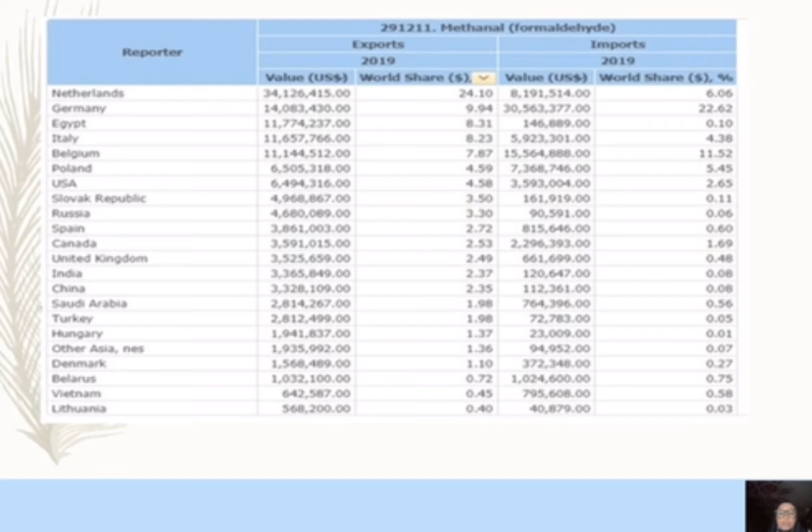and Vietnam. While the world's largest importers of this commodity group in 2019 are first Germany, followed by Belgium, Netherlands, France, and Poland. Okay, this is the graph of export and import 2019 of the formaldehyde production. Okay, we move to market study in Malaysia.

The Malaysian formaldehyde market dropped to 23 million USD in 2010, declined by -7.4% against the previous year. The growth pace was the most rapid in 2009, an increase of 1.2% year over year. Formaldehyde consumption peaked at 26 million in 2007. The most prominent rate of growth was recorded in 2009 when the production volume increased by 2.8% year to year. Over the period under review, production reached the maximum level of 26 million in 2007.

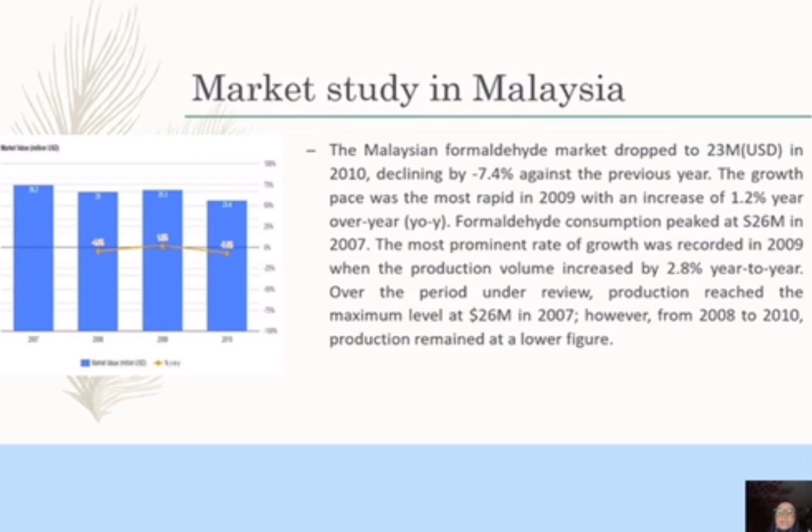We move to the consumption. In 2010, consumption of formaldehyde was finally on the rise and reached 59,000 tons after 2 years of decline. Overall, consumption showed a pronounced contraction. Consumption reached the peak volume of 67,000 in 2007. However, from 2008 to 2010, consumption stood at a somewhat lower figure. You can see at the

table left. The revenue of the formaldehyde market in Malaysia fell to 23 million USD in 2010, declining by -7.4% against the previous year 2009. The most prominent rate of growth was recorded in 2009 when the market value increased by 1.2% year over year. Over the period under review, the market hit record highs at 26 million in 2007. However, from 2008 to 2010, consumption remained at the lower figure.

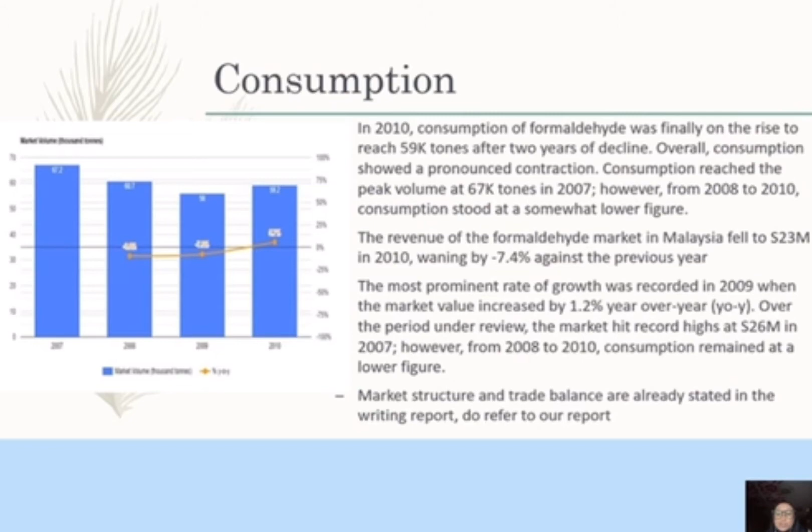Export of formaldehyde. Export from Malaysia. In 2020, the amount of formaldehyde export increased compared to 2019. Over the period under review, export showed buoyant growth. The pace of growth appeared the most rapid in 2012 with the increase year to year. Export peaked in 2020 and is expected to retain growth in years to come. Generally, the export recorded resilient growth.

The most prominent rate of growth was recorded in 2012 with the increase year to year. Over the period under review, export reached the peak figure in 2020 and is likely to continue growth in years to come. Okay, export by country. Thailand, Philippines and Vietnam were the main destinations of formaldehyde export from Malaysia from 2007 to 2020. In value terms, the Philippines, Thailand and Vietnam were the largest markets for formaldehyde export from Malaysia worldwide. Among the main countries of destination, Vietnam showed the highest growth rate.

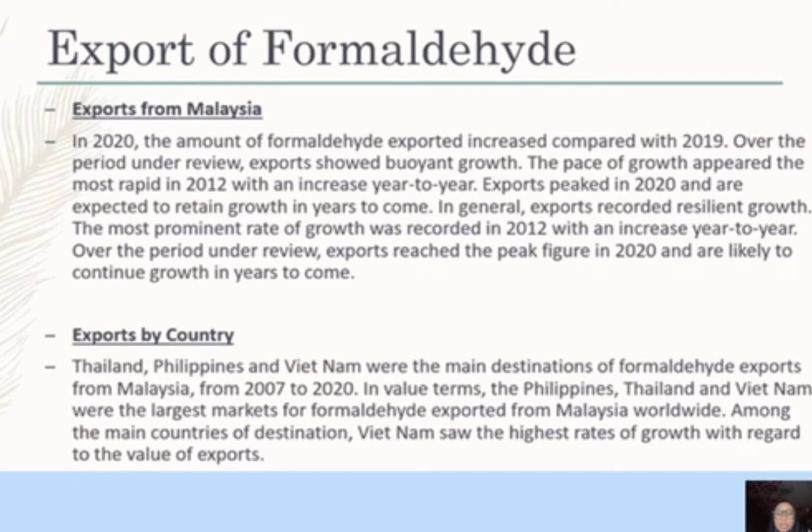We move to the import. Import into Malaysia in 2020: after 2 years of growth, there was a significant decline in overseas purchases of formaldehyde. The volume decreased. The most prominent rate of growth was recorded in 2018 with the increase year to year. Imports peaked in 2007. However, from 2008 to 2020, imports remained at a lower figure.

In value terms, formaldehyde imports declined significantly in 2020. Overall, imports show a drastic downturn. The pace of growth appeared most rapid in 2018 with an increase against the previous year. From 2019 to 2020, the growth imports remained at a lower figure.

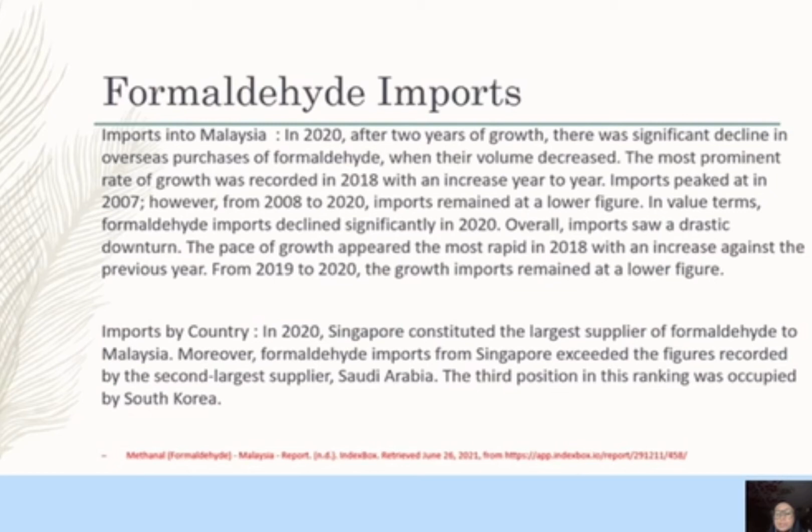Okay, import by country. In 2020, Singapore constituted the largest supplier of formaldehyde to Malaysia. Moreover, the formaldehyde imports from Singapore exceeded the figure recorded by the second largest supplier, which is Saudi Arabia. The third position is ranked by South Korea.

For formaldehyde itself, eliminate any unnecessary dilution, so it will help the waste minimization. And next, do not mix the waste streams, separate the waste streams. This will help to minimize the waste.

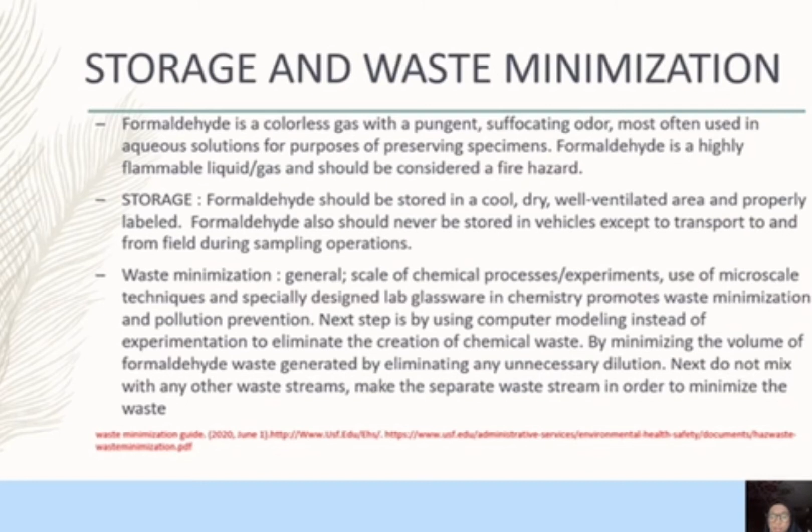I would like to continue my presentation on the process specifications part 2. Basically, I already explained the process specification for the equipment under the reactor. Today I would like to explain more on the process specification for two pieces of equipment, which are the absorber and the separator. So firstly is the absorber. What is an absorber?

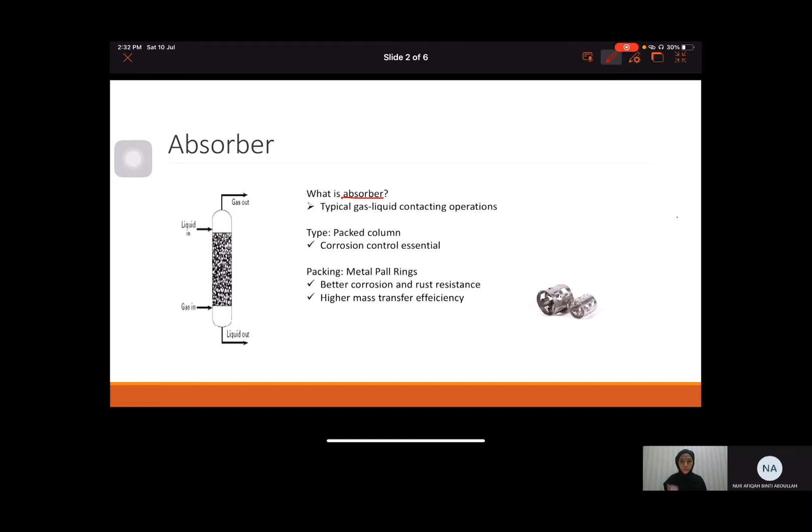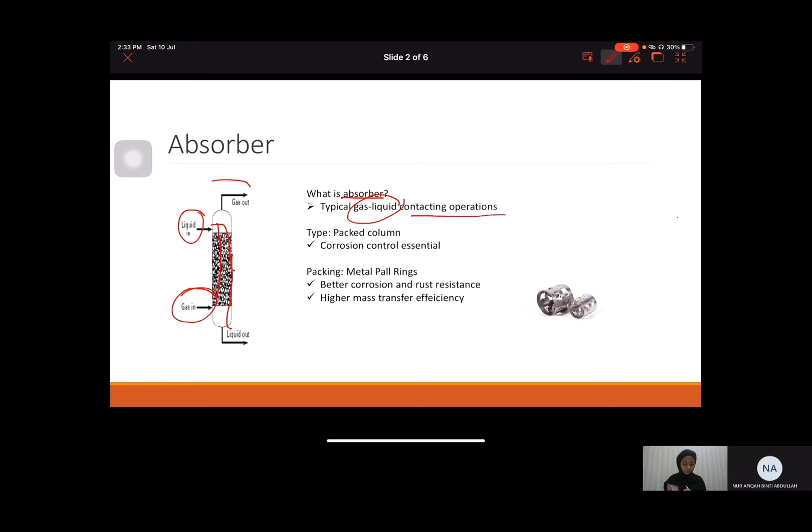An absorber is a typical gas-liquid contacting operation, where the gas travels up through the vessel, and the absorbed component goes into the liquid and is gradually removed from the gas. The absorber may be a packed column, bubble column, or spray column, so why do we choose a packed column? The figure shown here is a packed column. We chose a packed column for our production.

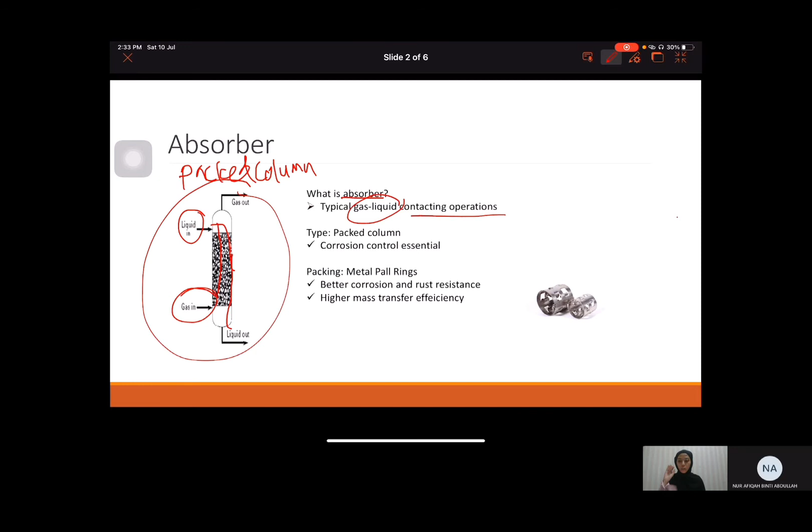This is because the packed column has advantages where corrosion control is essential. Since we are dealing with methanol and other substances that are quite corrosive, we need a packed column compared to other columns in order to handle corrosive substances, and also to handle toxic and flammable liquids.

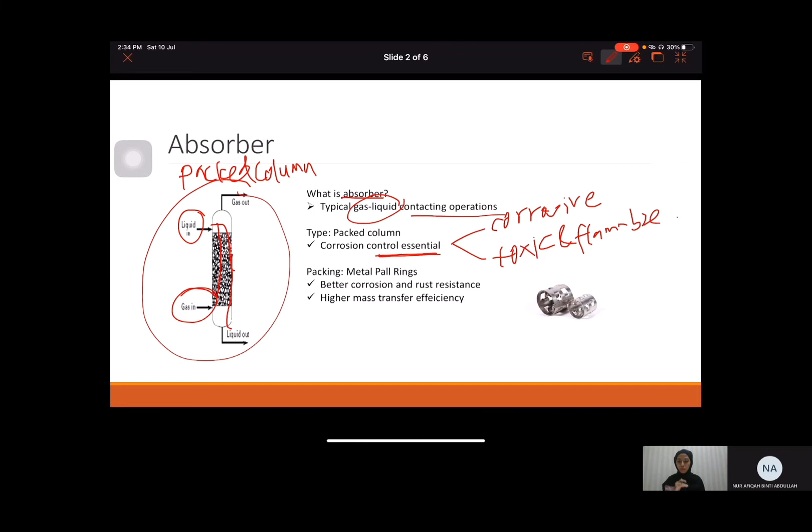Next, packings. The absorber packing we chose is metal Pall rings. Firstly, metal Pall rings are more suitable than plastic Pall rings because they have better corrosion and rust resistance, higher mass transfer efficiency, and better liquid and gas distribution. As I told you, our production deals with corrosive substances. Therefore, we need metal Pall rings as the packing for the absorber.

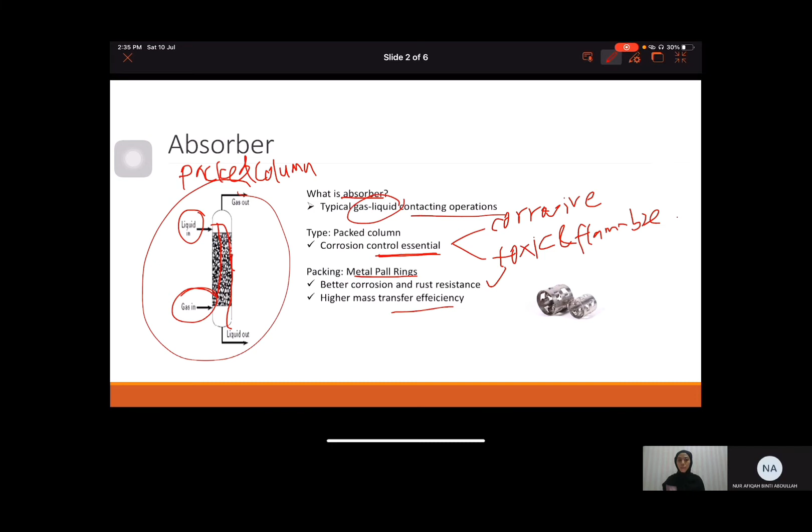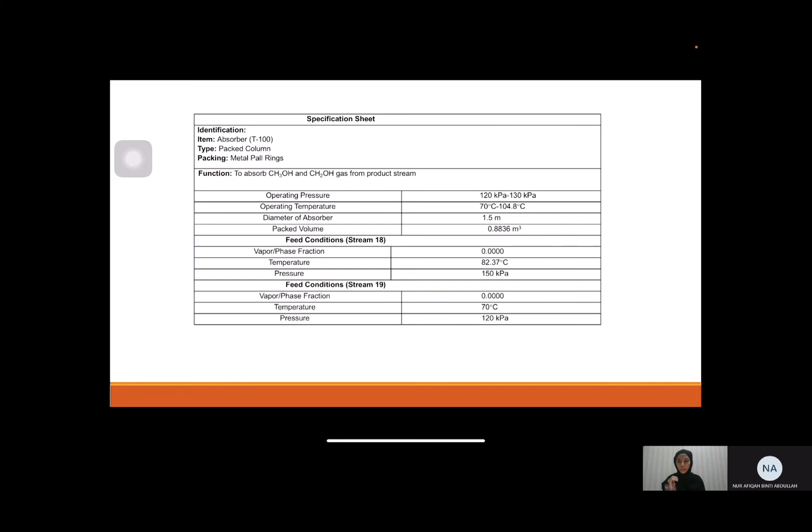Next is the specification sheet for the absorber. As you see here, this is the absorber T100, and the operating pressure shows values of 120 to 130 kPa. I obtained this data from the HYSYS simulation.

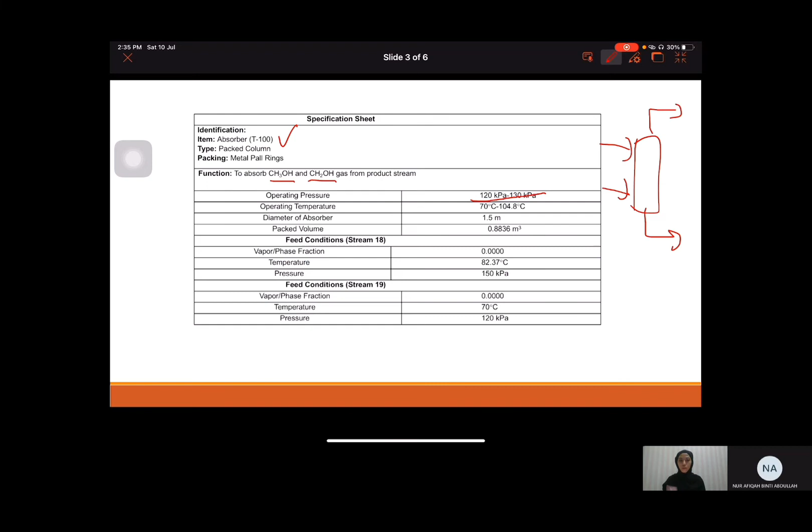The function of the absorber is to absorb the methanol in order to obtain the product without any gas. This is the off gas. And this is our product here, which contains formaldehyde.

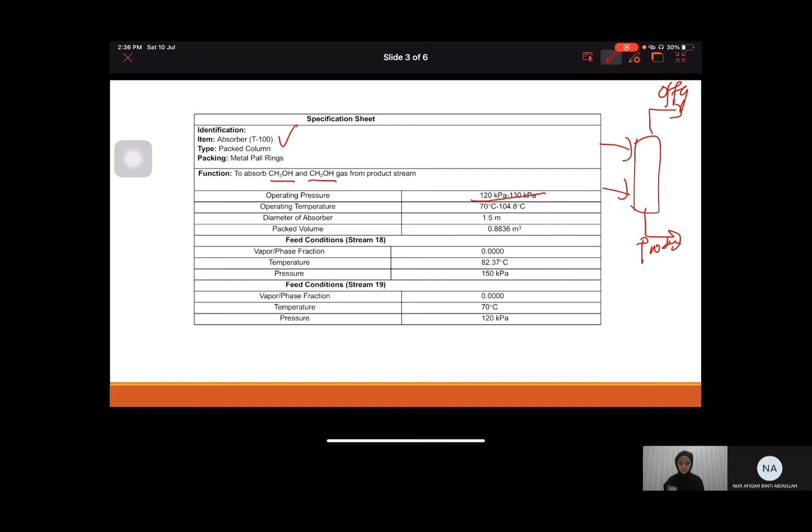Next is also an absorber, but this absorber contains a reboiler. We need a second absorber for our production to become more efficient. This was already explained by ICA for the HYSYS simulation. The data here I obtained from the HYSYS simulation, where the operating pressure is 120 kPa to 130 kPa, and the operating temperature is 70 degrees C to 104.8 degrees C.

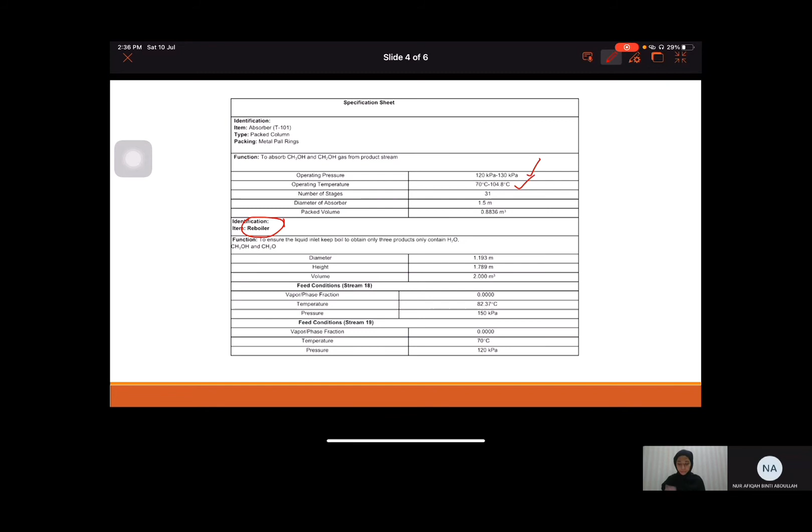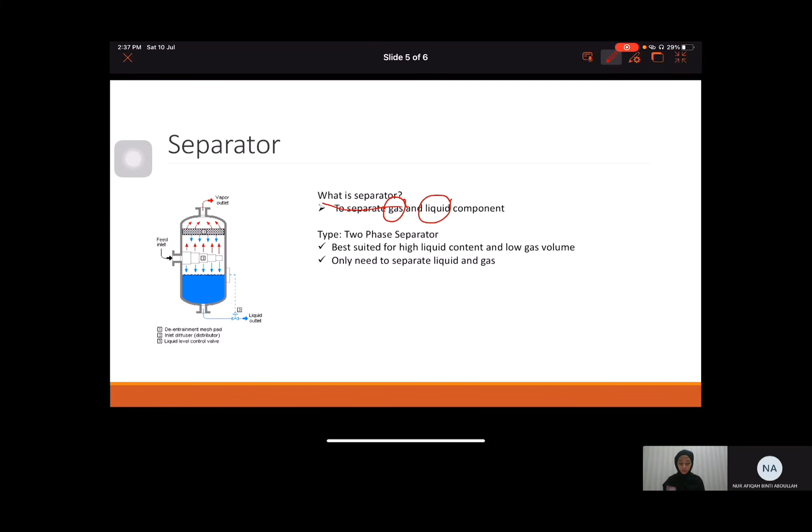Next is the separator. What is a separator? A separator is a vessel used to separate the gas and liquid components from the fluid extraction. There are many types of separators: two-phase and three-phase separators. Why do we need a two-phase separator for our production? Firstly, a two-phase separator is best suited for streams with high liquid content and low gas volume, where it extracts the liquids from the natural gas.

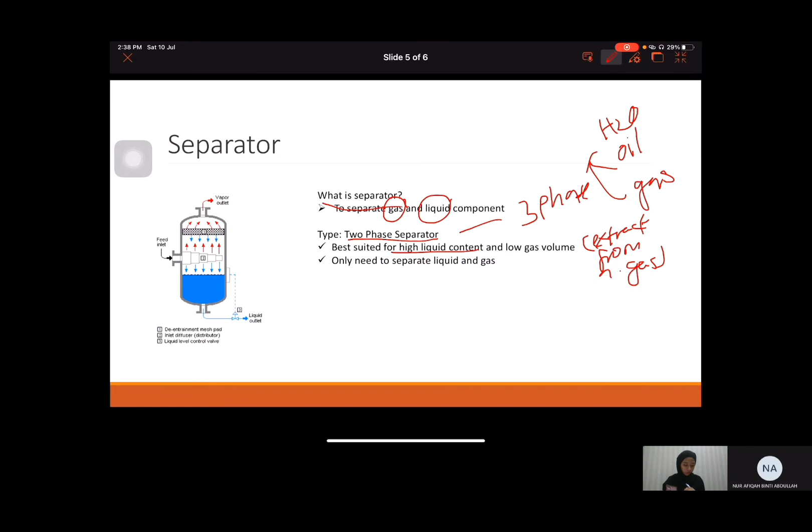Next, a two-phase separator only needs to separate the liquid and the gas, compared to a three-phase separator, which separates well fluids into H2O, oil, and gas. Since our production only involves liquid, water, and gas, and we don't use any oil, our production of formaldehyde only needs a two-phase separator.

Here is the liquid and the gas, since we don't have any oil. And here is a two-phase separator diagram, where as you can see, the outlets are vapor and liquid, no oil.

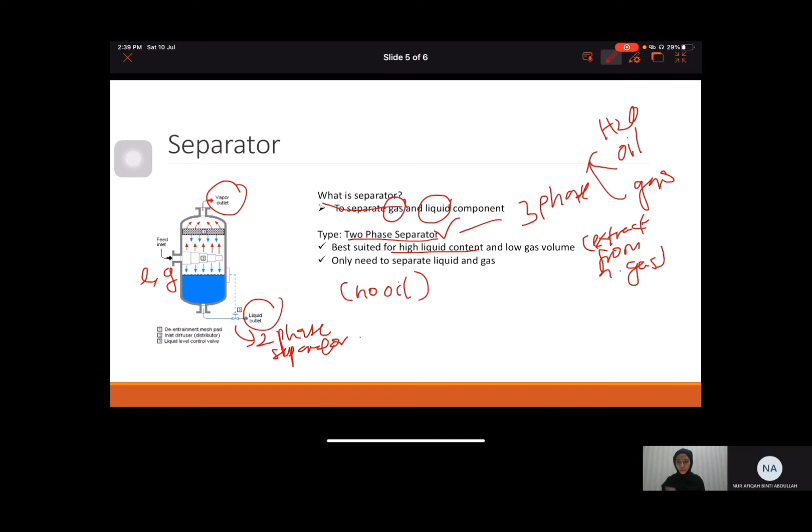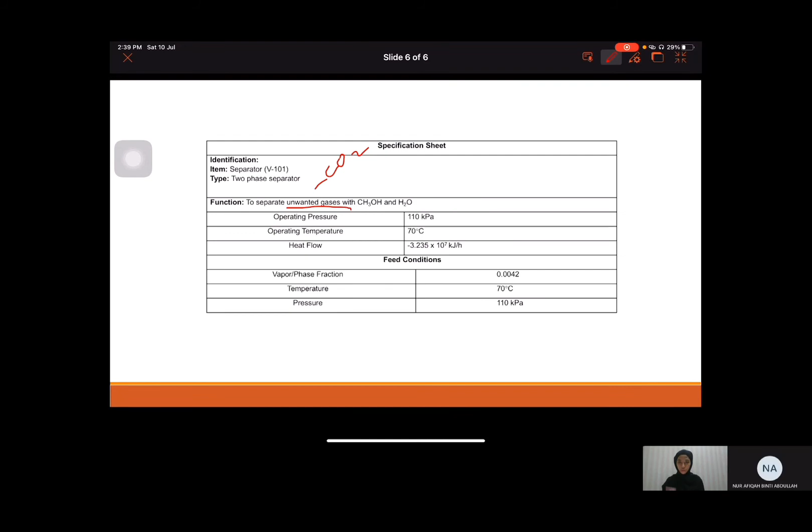So in part 1 we already have done up until the reactor unit only, and I will continue to the last part, which is a complete HYSYS simulation of formaldehyde production. So first we look into the separation unit. In our project we use an absorber unit. So what is the need of the absorber unit?

The main objective of the absorber stage is to condense formaldehyde, methanol and water, which may contain a selection of packing, trays and other features to promote the absorption, and in order to optimize the set of operational conditions and increase efficiency of the absorber. One study has been made by Winkelmann 2003, which is to apply two sequences of the absorber column. The separation unit may comprise absorption to extract the formaldehyde product from the oxidized gas mixture.

The reason why we don't apply a distillation column here is because this absorber sequence has superior convergence and stability characteristics rather than a distillation column, since distillation will give more calculation and iteration, resulting in an unconverged system.

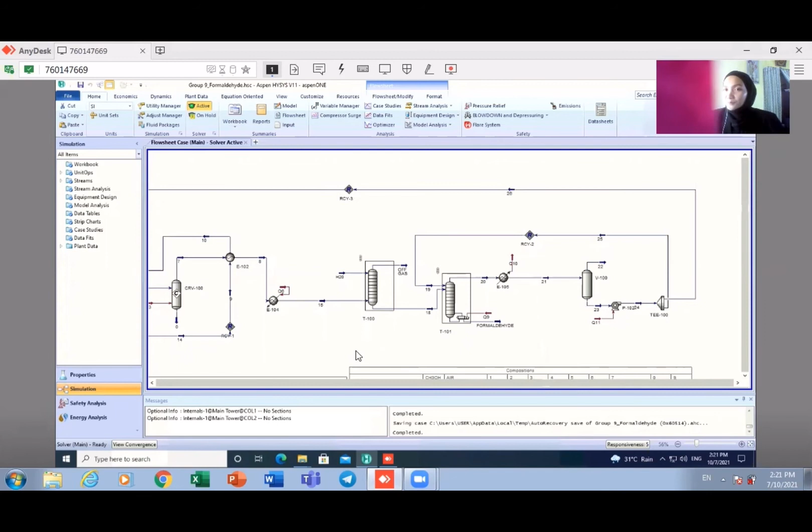So let's start with the HYSYS simulations. We continued with the product from the reactor. After the product from the reactor has been cooled down, from 650 degrees Celsius to 100 degrees Celsius in order to prevent any thermal decomposition of formaldehyde, where in this case we apply the network heat exchanger circuit to create a circulation of the water.

This product is then fed to absorber column 1, and in the absorber the water is fed at the top of the column to reduce the emissions of formaldehyde and methanol from the column. The top pressure of the column is 1.4 bar and the bottom pressure is 1.5 bar. The pressure at the top of the column must be lower than the pressure at the bottom to avoid any backflow and flooding in the column.

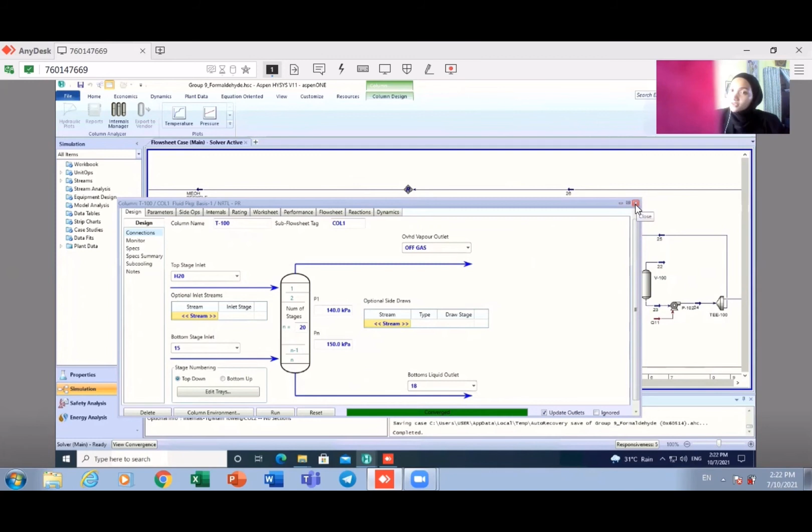And the formaldehyde is absorbed in water because formaldehyde is pure in gaseous form and highly unstable. It is also because the reactor product stream contains formaldehyde diluted in other gases, mainly nitrogen. As you can see here, the composition here is mainly nitrogen. So that's why the water must be fed at the top stream.

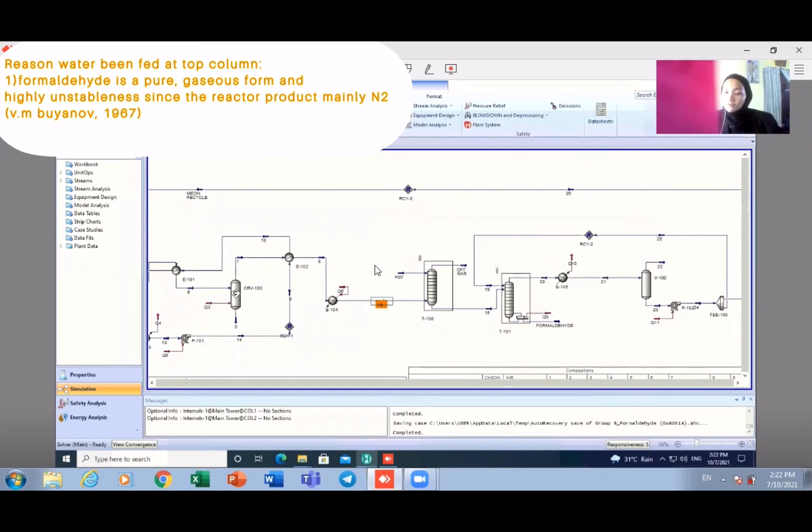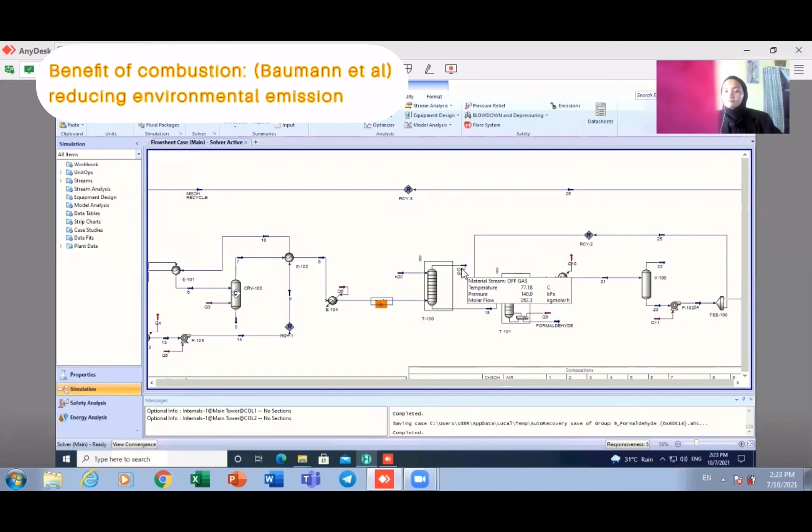The off gas that is emitted from this absorber will then be burned, and as suggested by Baumann et al., this combustion also gives benefits in reducing environmental emissions. So mostly the absorber is packed with packing, and if proper packing size and cooling can be maintained, then more than 95% absorption is completed. And in our project, formaldehyde absorption is 99.99%, which is, as you can see here, only 0.004 not absorbed.

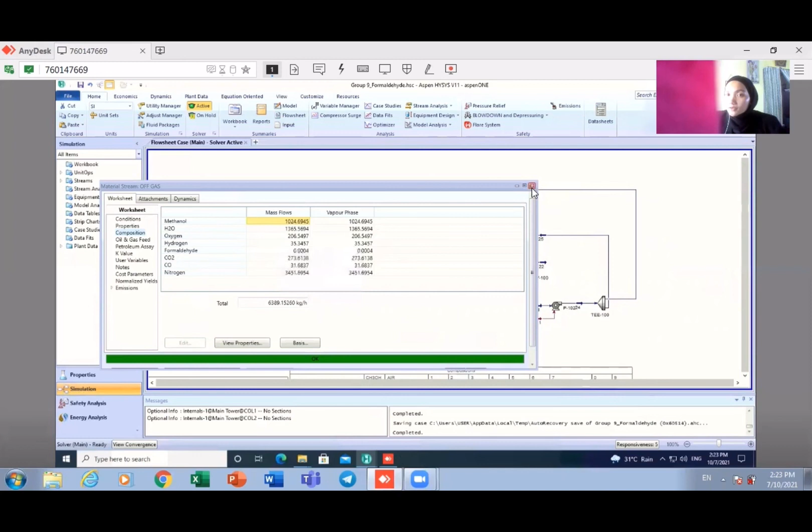So next, stream 18 enters the reboiled absorber since there were still unabsorbed gases from column 1. Considering our final product only contains formaldehyde, water and unreacted methanol, the reboiler will continuously boil the liquid to make sure that all the excess gases leave at stream 20. Since this is an exothermic process, Q9 will supply heat to the reboiler.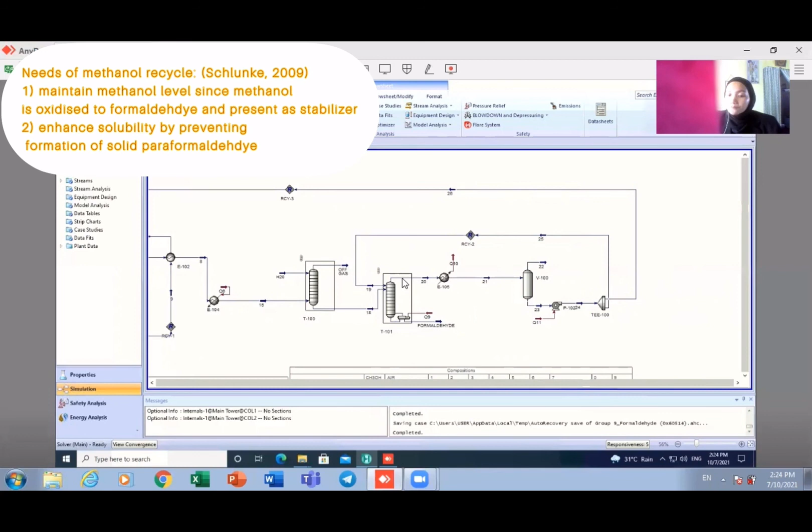Stream 19 acts as a recycling stream for methanol because we want to make sure that methanol is always in the column. Methanol recycle is needed in this column because methanol is oxidized to formaldehyde, and methanol is present as a stabilizer in formaldehyde solution since it enhances the solubility of formaldehyde by preventing the formation of solid paraformaldehyde.

In this case, we monitor the column by setting the reboiler temperature at 104.8 degrees Celsius, since formaldehyde must be in the range 20 to 105 degrees Celsius. We tried to monitor the temperature in the range, but only 104.8 degrees Celsius resulted in convergence with fewer iterations needed. The unwanted gases were 100% removed at stream 20. As you can see here, our product only consists of methanol, formaldehyde and water.

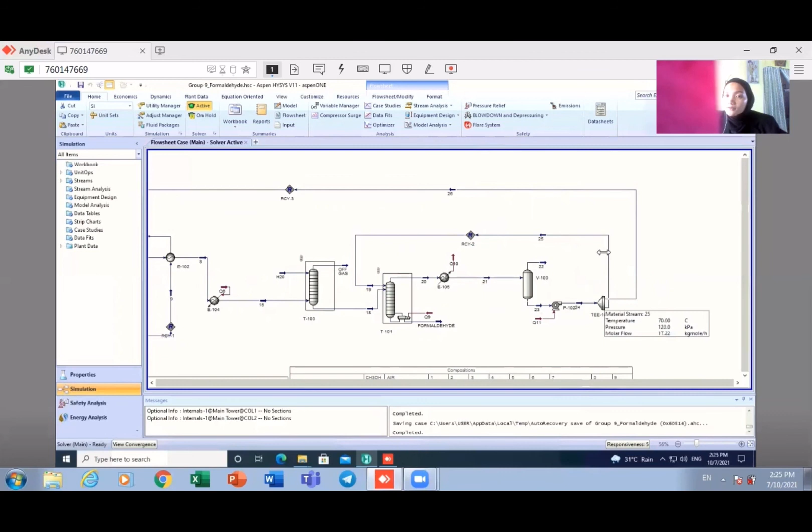After that, this gas stream will then be cooled down in order to be fed to the separator in mixed phase. This separator was used to separate all the gases and liquid because we want to recycle back the liquid methanol. This TEE-100 will split the recycled stream to T101, and the other one will mix with the methanol at the first stream.

To conclude all of this, the formaldehyde product that we achieve at the product stream is 39.73% with 0.0383 of methanol and the rest is water. We can achieve about 2.73% more than standard production data, which is 37% weight per weight as stated by VM Buyanos.